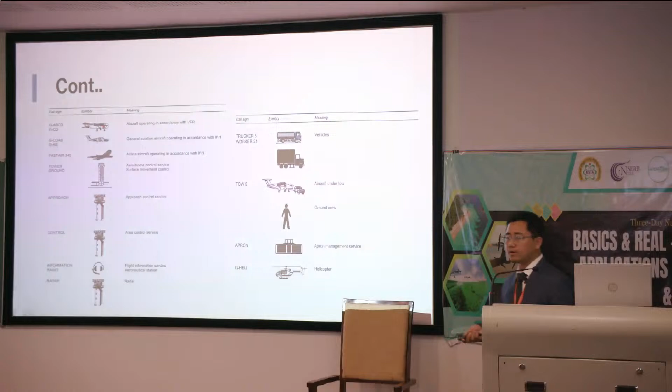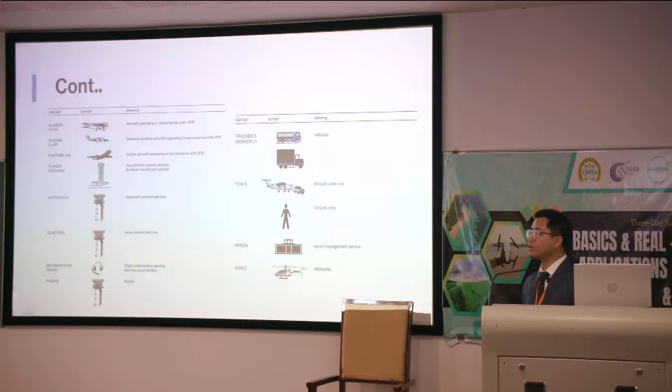Suppose you want to call a truck. A specific truck number and a specific worker or driver for that truck will be there. So you will call trucker 5, worker 21, to come to a specific location for an oil tanker or something like that. And these are different word phrases.

Acknowledge means let me know that you have received and understood the message from air traffic control. Or affirm: yes, affirmative. If you are flying a jet fighter in an emergency and about to crash, you will say, as heard in movies, Mayday, Mayday. That is one of the phrases of radio telephony phraseology.

These are the different units of service and their suffixes. For example, control center will be called control, radar is generally radar. These are the different meanings.

So how to report the position and altitude of your aircraft. First you have to identify your aircraft, since there will be many aircraft in the airspace. Identify your aircraft, position, time, level or altitude, and after certain intervals you will report again at significant points.

This is the diagram. The pilot first says the plane name, the nautical miles and speed, the flight level, 330, which is 33,000 feet, and the intersection name. The pilot says these words to air traffic control, and air traffic control returns with "Fast Air 345, Roger that." So they got the message.

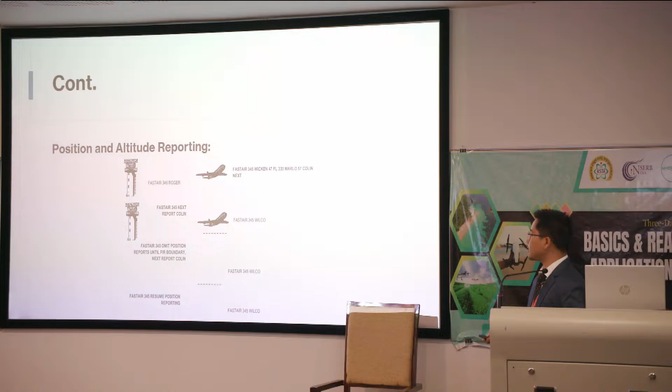And here, air traffic control is saying this again, and the pilot is saying "will comply" with this message. This goes on at certain intervals.

Next is flight planning procedures for UAVs, in terms of land survey. What does KML mean? Anyone knows? Yes, Keyhole Markup Language. We can modify that in Google Earth. KML is the area you want to survey. You draw that area in Google Earth, take the KML file, insert it into the drone software, and do whatever survey you want.

In the survey area, why are ground control points important? When you survey and mesh that area and want to create an ortho-rectified map with more accuracy, ground control points are required.

So KML preparation, identification of ground control points, which you mark in the real world in the survey area, and preparation of flight KMLs. Suppose you got a 7 square kilometer area and one flight can cover only 1 square kilometer. So you will divide it into 7 parts.

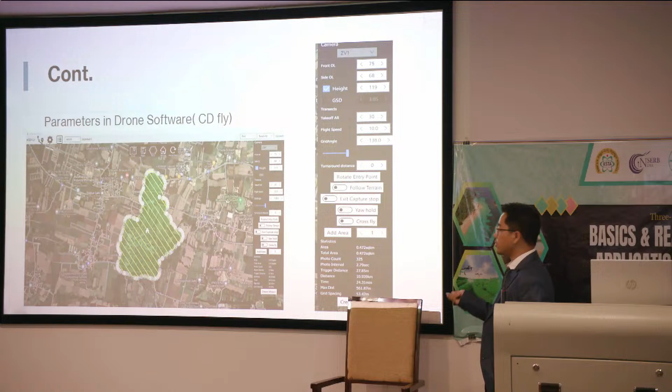Distance traveled is nothing but how much the drone will travel along this grid line. It is approximately 11 kilometers. And time taken will be 24 minutes. Maximum distance from home till the entry point is 561 meters. And the grid spacing is 53 meters. So you can see all the statistics here. After giving all these parameters, you will just create a mission. Here, create mission, and the next will be like this.

So this is the drone software in action. From here we were flying. It is going till the entry point. This was the entry point. These are different waypoints. You can see here, these are the parameters. Altitude: what is the altitude of the drone? 131, because it was doing terrain modeling. Although we have given 120 meters as the maximum altitude, in terrain mapping it will adjust its height according to the terrain.

Distance to home is how far the drone is from home, and satellite count is how many satellites are connected to the drone. And this is the average satellite connection. It should be less than 1. And this is the battery voltage. Maximum battery voltage for our drone was 25.2, so it is dropping. And wind current also you can see.

So all these params you can see, right? These are customizable parameters. Whatever parameter you want, you can customize that. And this is the ground speed. This is the time in air. This is the trigger count. And distance traveled, 0.42 meters.

Sir, actually, altitude will be fixed for a plain area. But if you give the terrain mapping option, suppose this is the terrain and our drone is moving, then the drone height relative to the terrain height will be 120 meters only. Yeah.

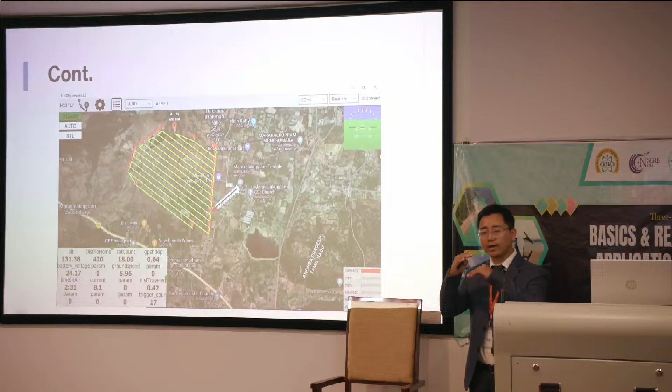As we can see, we made one mistake in this. We have not calibrated the drone properly, so the compass is showing that. If the compass is showing red, that means there will be a mismatch in the drone data. Some possible error might be there. Sometimes, if you fly near high tension wires, the drone compass will also get disturbed. Yes, some current issue might be there. So you should be at least 100 to 200 meters away from high tension wires, radio towers, or anything like that.

So next is collision avoidance system for UAV. Different collision avoidance systems we can see in cars also, like sensors; it will beep if it comes near. So in that case also we can integrate different collision avoidance systems in a drone. Sensor integration, like LiDAR sensors, to map around the area, if it detects an object. LiDAR is more accurate compared to a visual camera.

So we can integrate that. But the problem with a LiDAR sensor is it's very expensive. It's not economical. Then obstacle detection, like with machine learning, we can also do with a camera.

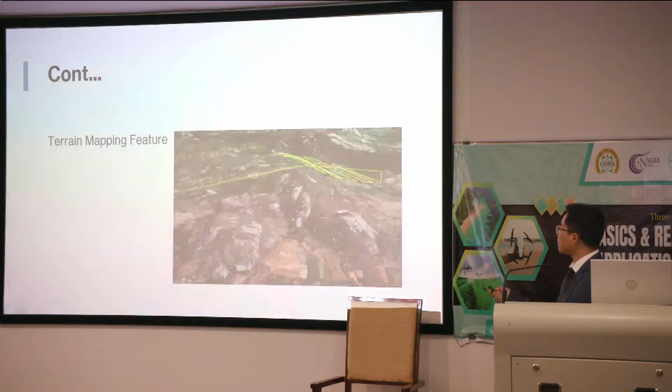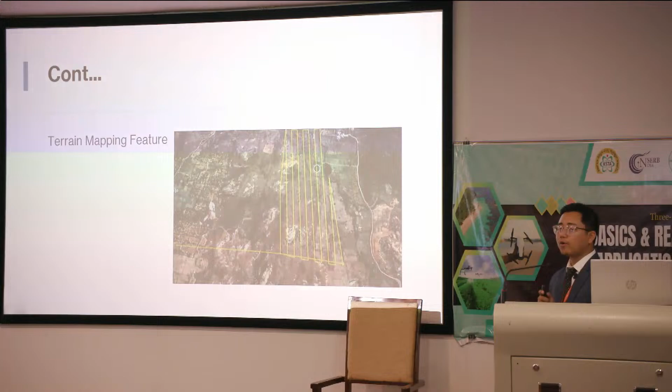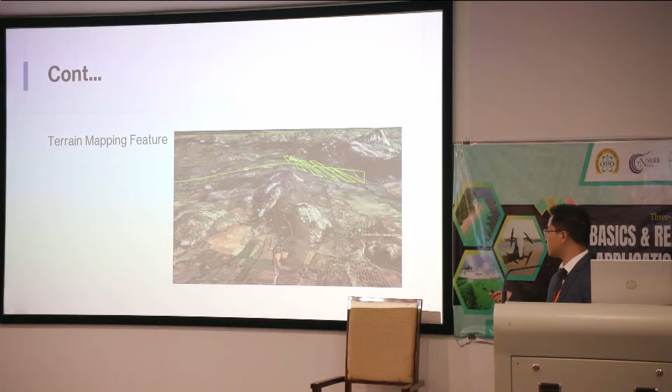So this is one of the collision avoidance systems, the terrain mapping feature. Sir, it's already applied in the software, but if you want to see this part, it is actually integrated with Google Earth. In Google Earth, all the Earth's terrain features are already there. But a new hill can come up, right, sir? So that is one of the things. But one issue here is, I'll convey that.

This is the hill. Suppose sometimes what happens is, above this hill, a tower will be constructed. So how will the drone software map the terrain? How will it know? It won't know, even if it has a sonar system, LiDAR system, or camera.

So what we can do is, the drone pilot should be careful about that. He should visually see and avoid that area. Although if it needs to be mapped, he has to give some altitude, or otherwise climb the hill and fly above that tower. Mostly the tower won't exceed 80 to 100 meters, so 120 meters will be fine.

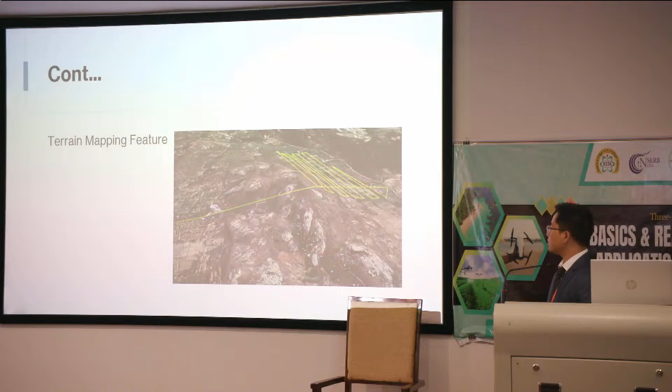So how to do UAV crash analysis, drone crash analysis? If the drone is crashed, suppose you are flying in an area and it crashed at that location, what needs to be retrieved and what needs to be visualized? It's like an inspection report. For example, a crime scene is there, so how do you make a report? A drone crash is also like a crime scene only. Certain lakhs worth of drones get crashed. It's a huge loss. So flight logs data - like in an airplane, if it crashes, a black box will be there.

Yes, so in drones also, flight logs, that black box type will be there. We should retrieve that flight logs data. And physical inspection is there - where it is damaged, in which wings, if all the wings are damaged or only some part, or if the motherboard is damaged. If the motherboard is damaged, then the whole drone is gone.

And environmental factors - suppose you were flying in a cloudy day when it's about to rain, or a high wind area. This also contributes to UAV crashes. Flight path - I'll show you one case study next. Human error will also be there. This is the case study linking to that point. System malfunction - sometimes, yes, it is a machine, it is not perfect. Sometimes overheating issues might occur. Malfunction will be there, it also contributes to the crash.

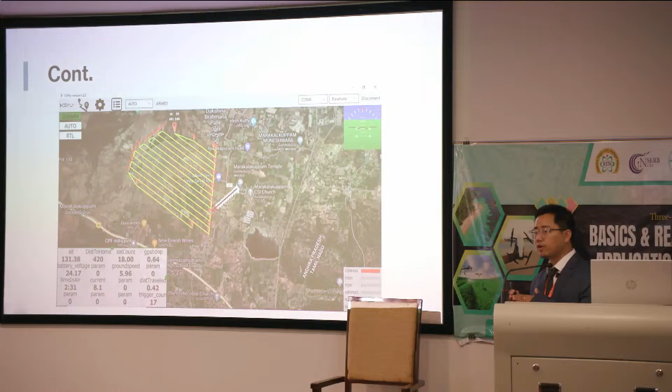And battery and power - you should always monitor the battery voltage. As you can see in this software, you are monitoring the battery voltage. It should not be less than 18 volts. Although it has a fail-safe feature, sometimes a sudden drop of battery will happen. For example, a huge wind gust comes opposing the drone, and it will consume more battery. So that also needs to be taken care of.

And rules and regulation compliance you should always maintain.

So what the drone did is, the area is here and he was flying from here. He thought that if he gave terrain mode feature, it would have gone above this hill, but he forgot to give it. So what happened is, you can see here, the drone flight went till the takeoff altitude, and it was going to the entry point, went straight, and hit this mountain. So the drone crashed - that was human error and a visual inspection error, not a technical error.

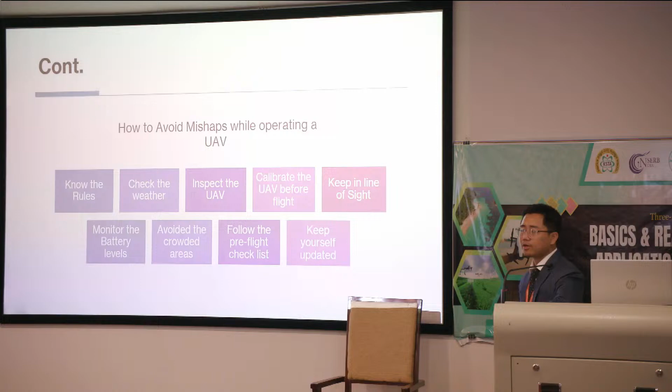So keep yourself updated, that's the main thing. Always keep updated with the rules, regulations, and different technologies.

A future advancement required in this field is an automated unmanned traffic management system. Like in India, we have Digital Sky, as I said before. In Digital Sky, it is not automated, we are entering the data manually, and live airspace is not there for drones. It should be developed, along with advanced collision avoidance systems.

Speed limit will be there. And development of secure links and reliable data - drones will be flying around, but how to secure that? Someone can hack it, because it's an open space and unrestricted airspace. So you should develop security measures for that.

And integrating real-time updates of geofencing data - for example, suddenly somewhere it will show a red zone, some minister is coming, so that airspace is restricted. Live updates directly should be there. Widespread integration of simulation-based training - to advance in this drone or UAV field and get our youth interested, simulation training should be there, to get them more interested in how to fly and what opportunities exist. It will create an open door for them.

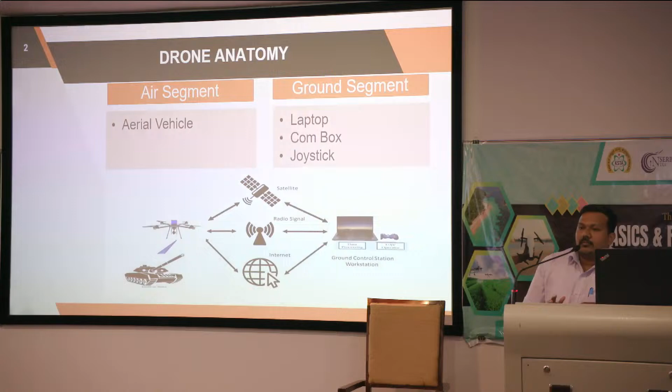Not only that, if the drones are very long range drones, for the communication, everything, in case of military drones, they will rely on even satellites. So satellites are also a part of the drone systems. Except the GPS, anyway, GPS satellites by default are part of the drone system. So other communication satellites for military purposes are also part of the drone systems. So we'll go in detail about the communications, how it is going to happen.

So this is typically the multi-copter we are going to see here. The model we are seeing is the Tunga Trishya Pro. We have got it from Tunga Systems, they are the manufacturer. There are multiple kinds of drones you must have seen in previous sessions. Now what we are talking about here are professional survey grade drones. They are typically around 4 to 5 kg and come under the small category. They will have a minimum payload endurance of 1 hour.

But there are nano categories, less than 250 grams, that we are not using, because basically we are a mapping agency. We do a lot of mapping. In addition, all the surveillance and other activities we are able to do.

So as I explained, there is a ground control station. This ground control station consists of a communication system to send and receive. Then they typically should have an antenna, where the radio communication is happening. So the radio antenna is there. The radio channel is 2.4 GHz. That is the open channel for Government of India. Only on 2.4 can you operate any communications. Anything beyond that is not allowed. But the ground demonstration you are seeing is a typical system.

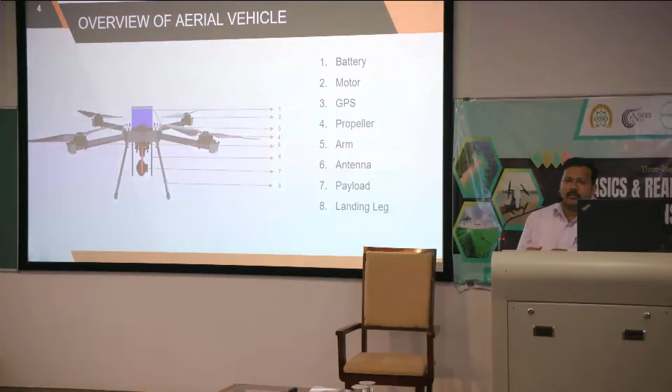So in addition to the existing GPS, there will be a high-end GPS on board. We call these PPK enabled drones, Post Processing Kinematic. A base will be established on the ground near the ground station. We do the positional corrections of the satellite, drone and sensor later, so we are able to create proper 3D models, orthophotographs, digital elevation models, everything.

So the propeller, arm, antenna, payload, and landing leg are part of the vehicle. We are going to see a little bit of detail about that.

So motors, most of them are DC motors only. There are two motors people generally talk about: brushless motors and brushed motors. Now almost all drones come with brushless motors. It is nothing but that the commutation of the motor is electronic.

That's the difference. Knowing this much is enough, because we are not going to do much work on the motor maintenance part. If that kind of detailed repair is required, it has to be handed over to the OEM manufacturer or an authorized service agency.

Okay. The propellers: everybody knows the propellers. It's a blade, so it will cut the air, it will create the empty space above the drone, so it will create a pressure difference, you must be knowing that.

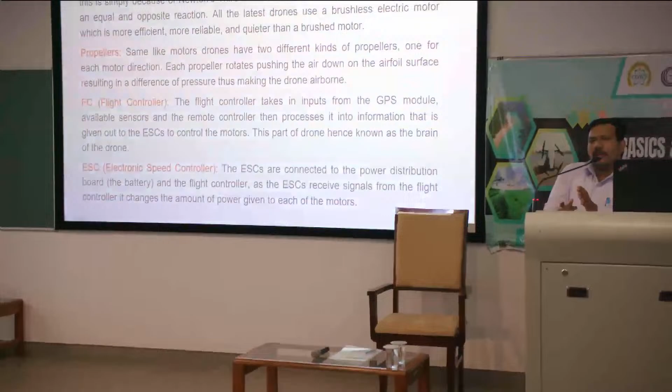It is required. Then the flight controller takes all the inputs and directs the plane. It has a GPS module, available sensors, it will be linking with everything, and the remote control obviously. So our communication will be linked through the flight controller. It is basically the brain, an important part. It will have an autopilot mode, different kinds of pilot modes, and all command and control structures inbuilt for navigation, flying, mapping, everything.

Then one more device is the electronic speed controller. Through this the speed will be controlled, the power will be controlled. The name itself indicates that.

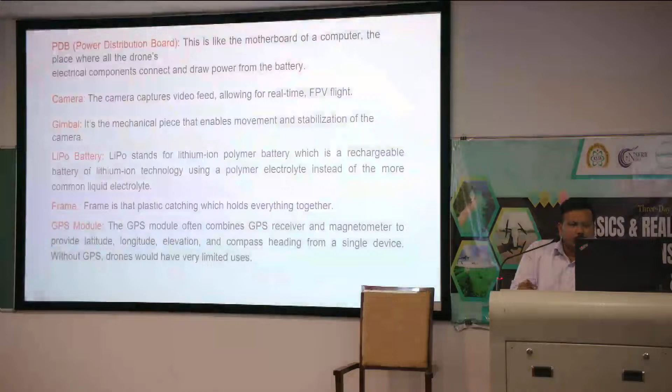So the power distribution board. It's like a motherboard of the computer. It will connect all the electronic components and draw power from the battery to give to them. It's basically a motherboard of a computer; all the electronic parts will be embedded into this.

Next come to the camera, payload, sensor; these are the same terms. Typically there are two sensors mainly, for surveillance and survey. Surveillance is video photography, so anything where real-time video is required, it will capture. And thermal; there are multiple payloads we are going to talk about. The thermal sensor is also video photography.

Then coming to mapping, with the photogrammetry payload. It's a still frame camera. It will be used to collect pictures from multiple angles to create orthophotography and a digital elevation model. And we will have agri drones, so the payloads will be different.

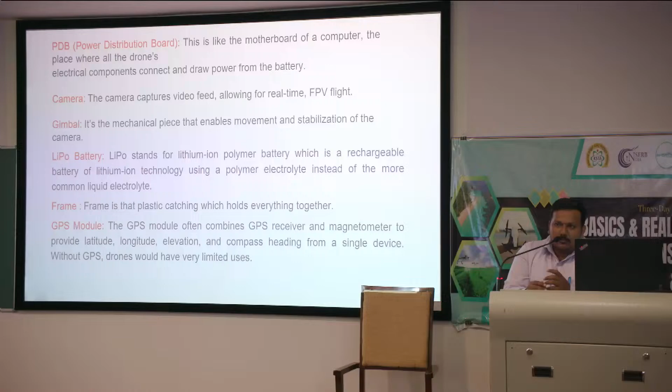Then the gimbal. The gimbal is a mechanical mount. It enables movement and stabilization of the sensor rotations. We can give any rotation, any movement through all three directions, and the gimbal will help with that. The gimbal will be controlled through the flight controller.

The frame is the skeleton of the drone; everything is going to be attached to the frame. Then the GPS: the same chip will be on this also, except for the survey grade drones. But it will have a minimum of two.

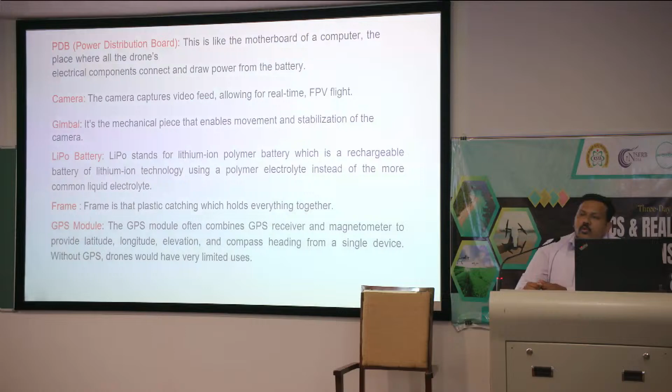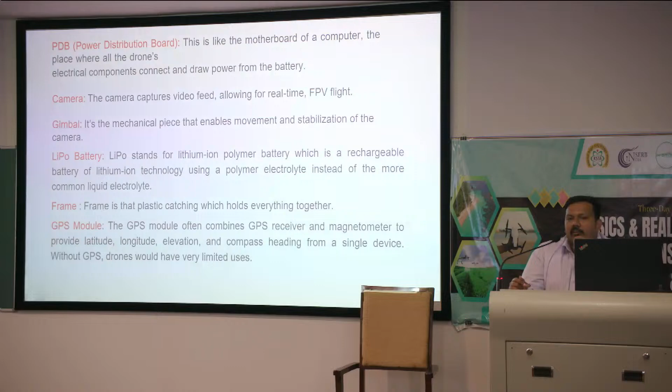Because of any failure, the redundancy will be there to avoid any mishap. Even with a failure, there are mechanisms in the drone to come back safely. There are safety measures the class will explain: return to land, return to home. Still, to avoid any delay, GPS redundancy will be established. It will be a small round object. It will give positional accuracy of 3 to 5 meters. If you are okay with that accuracy, we can work on that.

Then the remote control receiver. It is the sensor receiving the signal from the remote controller. The remote controller provides the link between the user and the drone. They are similar to other remote controllers; the difference is they are more sensitive and more robust because they have to work on it.

Then coming to the output of it, the video transmitter is required. Whatever the drone sees has to be communicated in real time, otherwise there is no use of it. For most, there will be use, but not the immediate use of it.

So for that, it immediately has to be transmitted. The transmission can happen over a small distance; they even have internet-enabled drones, nano drones. But for long range, you need radio wave communication. So we should have that antenna.

With that antenna, the video transmission also happens on a different channel. That's it. So the company uses the RF frequency for communication and control, as well as transmitting the video or photographs, whatever we are capturing, to the system.

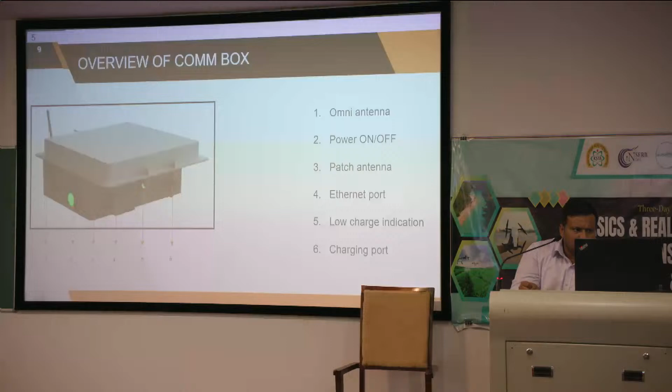So what does the communication box do? The communication box definitely should have an antenna. Antennas are of two types, patch antenna and omni antenna. The omni antenna is 360 degrees; it can receive and send the signal, but the communication range will be smaller. The patch antenna can receive signals from or send signals over a large range.

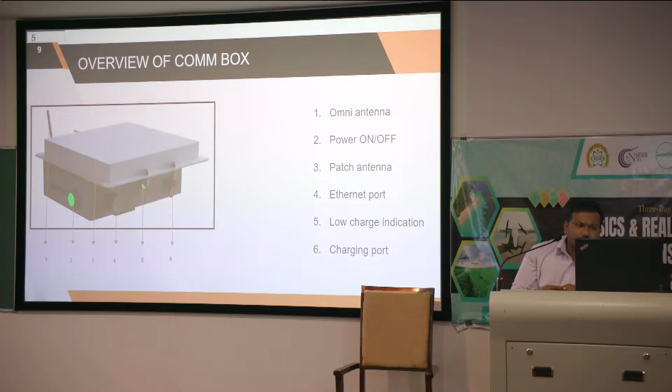Typically our drones now have a 5 kilometer range. This antenna is good enough without any LOS, loss of signal, or line of sight; both are LOS. With that we can do long range mapping. We have to do continuous mapping of the area, so in that case we use that fully.

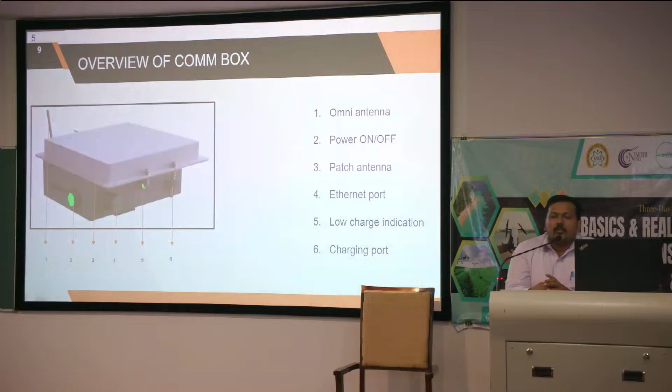Obviously you should have a power port and a communication input-output channel, here nothing but Ethernet communication, and it should indicate the charging capacity. Every communication box typically has this. When charging comes, we will see what things are required to do that.

Roll, pitch, yaw is very important to understand to control drones, and if you studied photogrammetry or stereo data processing, you also have to measure roll, pitch, yaw to process the data accurately and effectively. It's the rotation about the x-axis, y-axis, z-axis. The controller will know that.

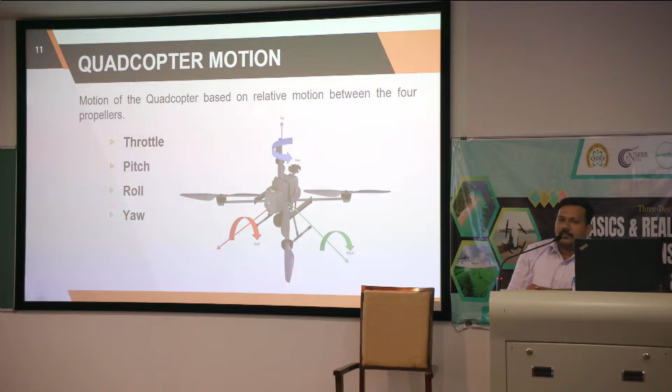So it is very much required; the gyroscope in the system measures these angles. It helps us make the drone more stable, straight, or as per our requirement.

So propellers: in the case of a quadcopter, there will be 4 propellers. 2 will have clockwise rotation, and 2 will be anti-clockwise or counterclockwise. So this is very important while actually doing the assembly. We have to do it properly. If you mismatch the propellers, it will crash.

Even well-trained pilots sometimes miss this. Even though they have given the same color codes, everything, the screw will be one color, red or blue, still it happens. That's why in maintenance we are going to see what checks are required, so we should get into the habit. It is like driving a vehicle, so we have to build more habit around it.

We should do simulation; a lot of simulation software is now coming. So whatever drones we are using, you have to use the simulator to get full control, if you want to be a drone pilot.

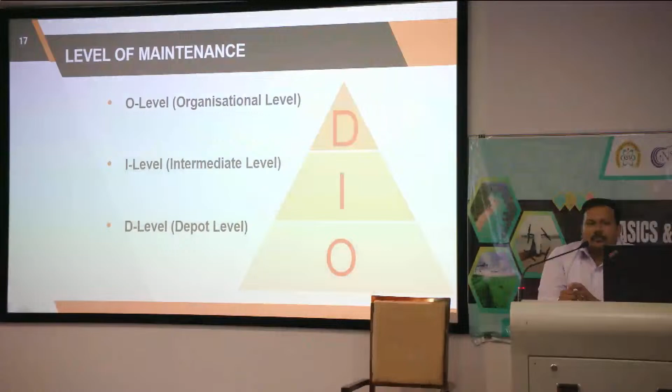Okay, you can ask me: can I do all the maintenance? No. A remote pilot cannot do everything. Basically the pyramid has 3 levels. There is the organization level, that means our pilot level, the user level. Then the intermediate level: if you are a very good remote pilot, with additional effort you can do that intermediate level of maintenance. Then depot level: it is the OEM, they can do replacement and overhaul. So any maintenance will be part of these 3.

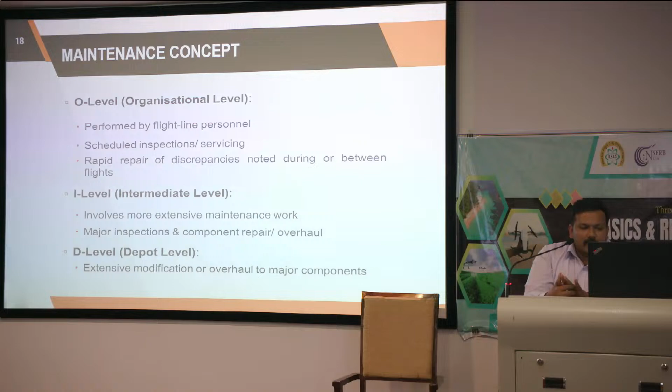What is organizational level? It will be performed by flight line personnel: scheduled inspection, servicing, rapid repair of discrepancies noted during or between flights. So we are checking for any discrepancy. What is intermediate level? It involves more extensive maintenance work. Major detailed inspection is required, and component repair is done. Depot level is beyond that. It is more like a manufacturing level, if any corrections are required.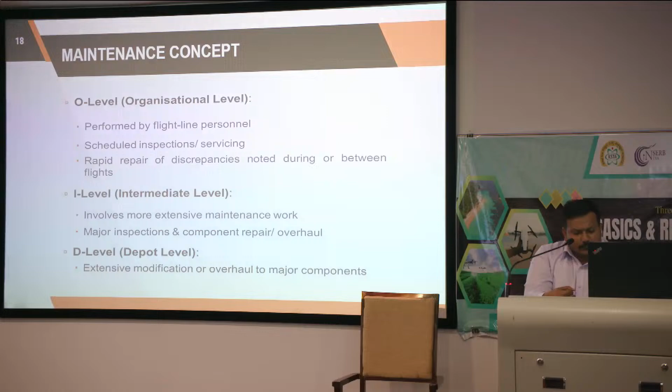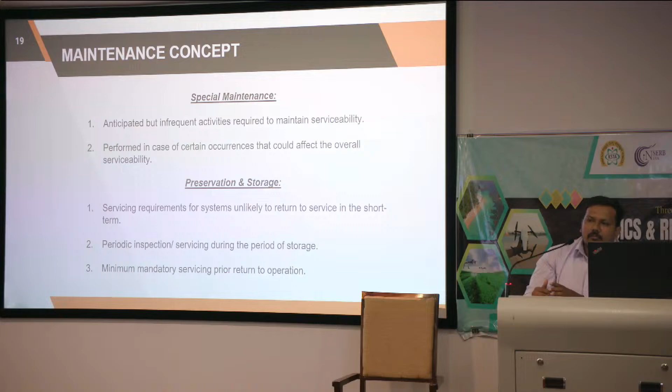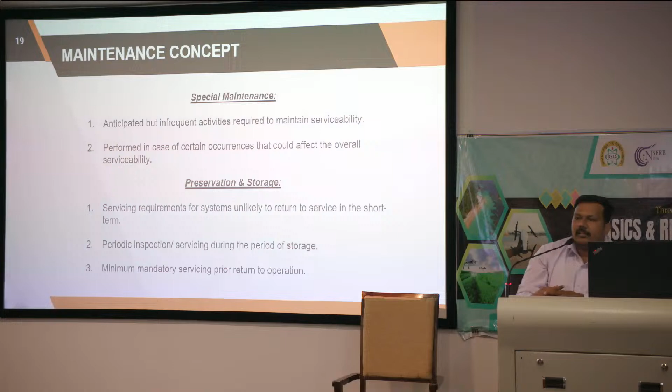Each manufacturer will provide a complete manual for their systems. Generally they are the same, but depending upon the modules and components involved, the procedure will slightly vary. We have to study that at the time of procuring the drones; the OEM will do that. Typically they will provide 1 week of training. I am not talking about the remote pilot license. It is only for handling the drones.

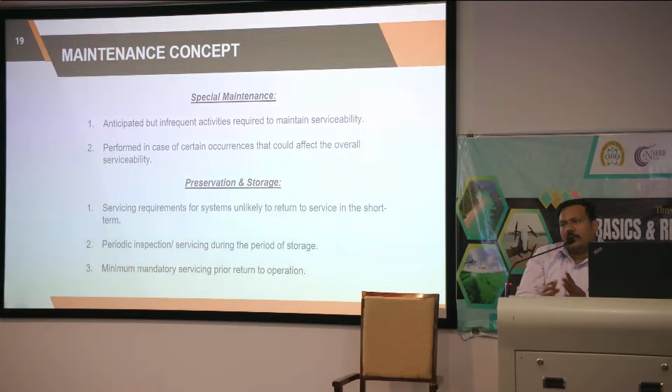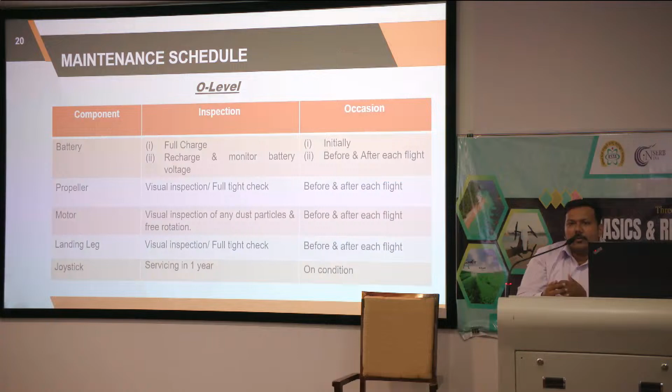So typically some timelines schedule we are talking here. Battery anyway full charge, everybody knows we have to do first full charge for any battery, so we will do that. That is already in our head. So recharge and monitor battery voltage every time, how quickly it is going in. Every time battery recharge will be after flight, that is mandatory, every time we have to do.

Propeller, we have to do the visual inspection, the tight check every flight, before and after. Before flying also you are doing, after flight also you have to do. So we cannot be a little careless or something. It should be very, very critical. Propellers is very, very critical. So whatever before and after each flight, it is very much critical reference.

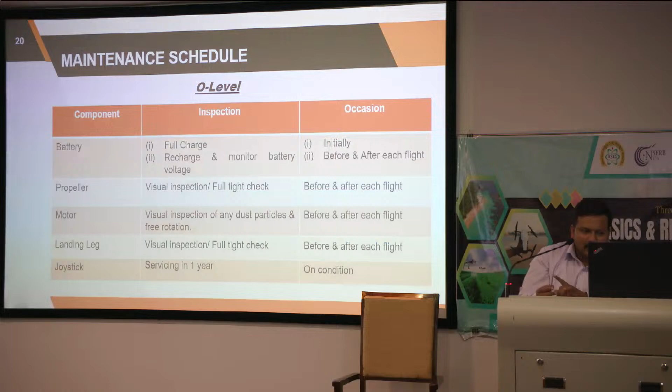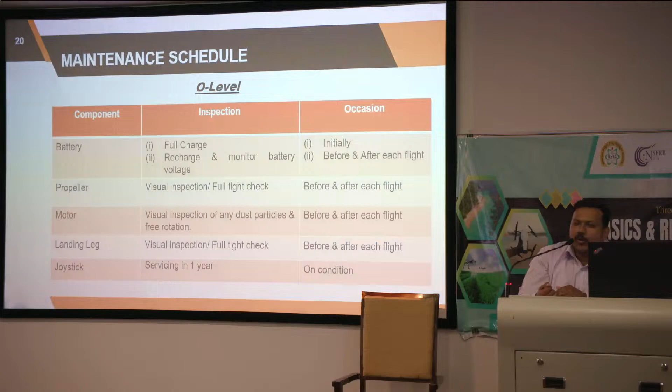Then motor, so motor visual inspection, any dust is there, free rotation is happening or not. It is also before and after each flight. So landing leg, visual inspection, whether it is fully tight, any crack is there, any damage occurred. So joystick or remote controller, if you are using, typically 1 year is okay for the remote control. If you are a rough pilot, you have to do it little frequently. So it is how you are handling your drones, it depends upon it. So it is on condition, there is no time.

So battery, we have to check. This battery charger is little different from a normal charger. It is a balancing charger will be there. The battery will be, multiple cell systems will be there inside the battery. Depending upon the drone endurance, 6 cell, 8 cells, 4 will be there. So 1 or 2 I can show that.

So always the capacity of the battery should be 80% more. If it is not even charging 80%, we should replace it. So typically a 200 charge, 300 times, it should be recycled.

So there is a discharge also, it should be there. If you are putting your drone for a long system down, you have to discharge the battery, remove it and keep it idle. So all things will come in the manual. We have to keep this checklist, we have to remind it, note it down, every action we have to do that.

So landing leg, if in case of any issues, otherwise 300, 500 landings, now every drone is capable of doing that.

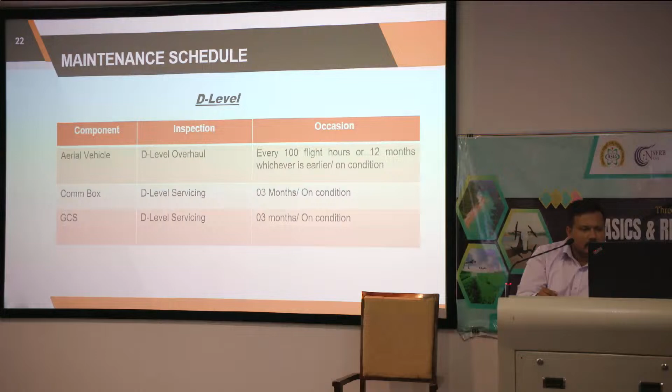So we have to send every 1 year, anything overhaul required, we have to send to the OEM for any further complete overhaul, any damage assessment, everything that has to be done. So Comm Box, GCS, depending upon the issues, we cannot do much on maintenance into that, so only dust and things. We cannot sit and put screws or do electronic or nothing. We should do that because sometimes it is working, but in flight it may give the problem, so we will end up in trouble. So that has to be clearly done by the OEMs or an authorized service agency for the purpose.

So what is required for this maintenance, anyway for battery charger, so that it will do the charging, discharging, cycling, there are all that buttons, modules, everybody available. So balancing, charging, everything is there. So we have to do properly. That is enough, that charger itself acts as a tool to check everything. It will give every vital information required for verification and checking.

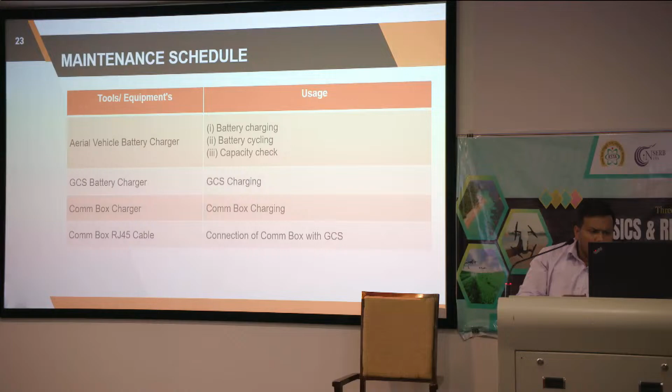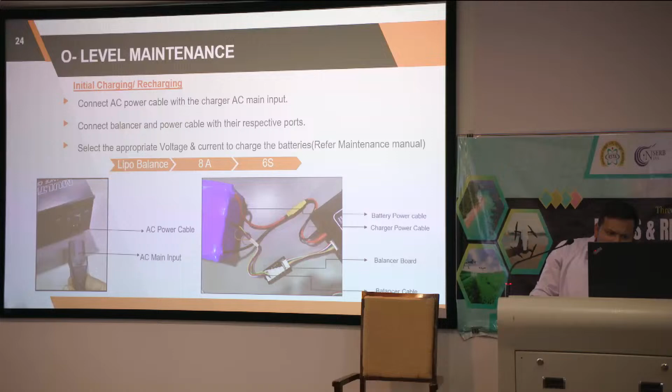So some figures here we are seeing it. This is Tunga Systems, their battery. So it is a 6-cell battery, 8 amps required input. So these are the components: battery, power cable, charger power cable. There is a balancer board. So to increase the capacity of the battery, and the charging should be also having well balanced. So they are using the balance board for that separately. So without that also you can do charge, but it is recommendable to use the balancer into that.

So it is organization level we are doing. This is the way typically Commbox recharging will happen. It is low consume power compared to the battery required, so we can use that. It's only 3 cell battery, 1 amp is enough to have a full charge power up.

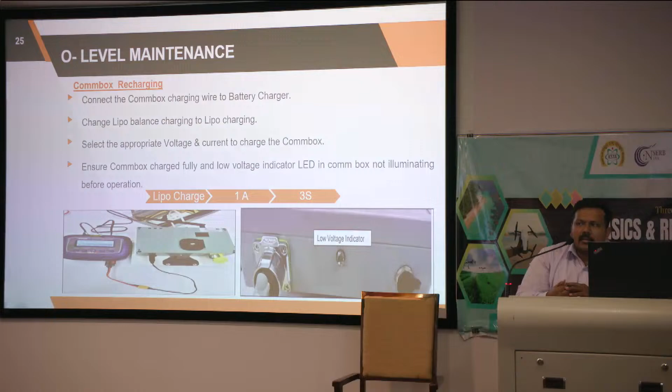So any indicator, always all battery will have indicator. Low indicator should not be red, that's it, so it has to be. So anytime before starting the flight, 80% of the battery power should be available.

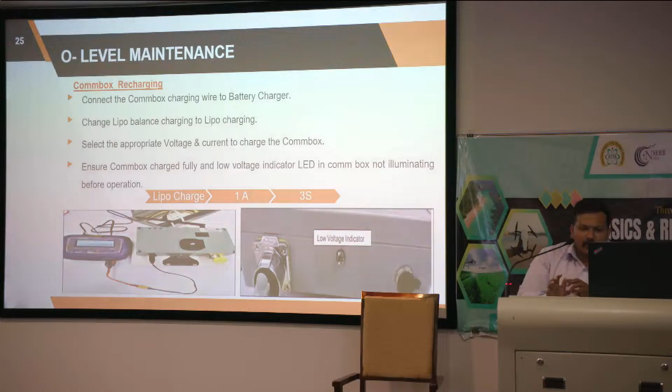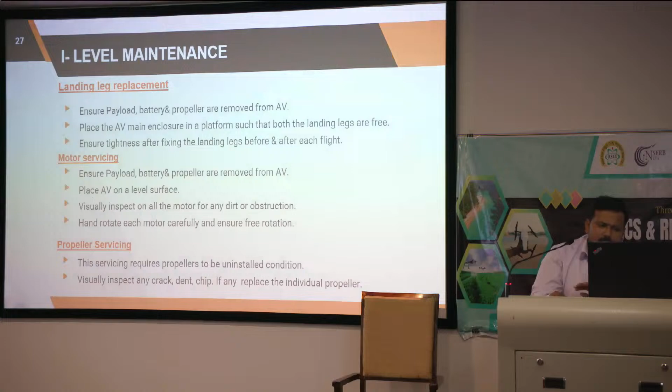So what if something happens? That's also part of it - if a crash or harsh landing happens, what is the procedure required?

First, anyway, right now all drones above micro category should be insured, third party insured. The insurance is part of DGCA, I think you covered this in class. You have to take proper photographs as proof for collecting, if you want to claim insurance. So everything has to be properly documented first.

Then remove the battery, second, without any hesitation. Then remove the propeller. If the battery is damaged, it can be explosive, so you have to keep it isolated. Then you have to convey this to customer support, whatever the case may be.

So we should know what we are going to do in case of that. Even if you try to hide it, the flight parameters and logs will show which command was given - everything will actually be recorded. Every activity, every control will already be recorded in the system logs. So whether it's a system failure or operator/remote pilot failure, everything will be easily detectable. That is the information we will have.

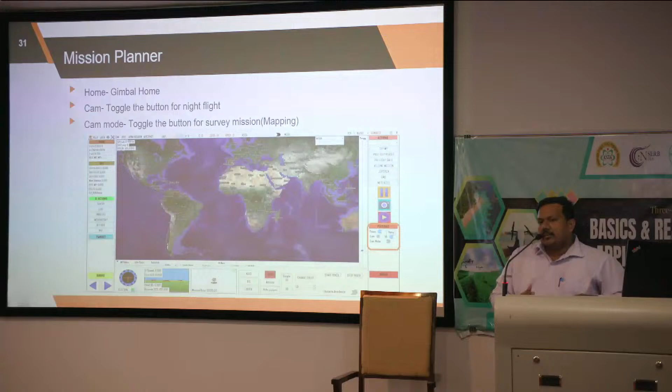So switch between, if you have the dual payload, some payload will have a day camera and night camera - it's nothing but a thermal camera. You can switch over between the video simultaneously, you can parallel view. All can be done in the Mission Planner or controller.

So it will tell you whether it is autopilot mode, what is the aerial position, what is the range from ground station, what is the height, altitude - everything will have information in that Mission Planner.

So typically one status bar will provide speed of the aerial vehicle, distance from home point - that is nothing but the GCS station, home point. So at the start of every flight, you have to record what is home. We have to tell the system, because in case of failure, it should come back. That is part of safety measures, part of drone operations - we will learn in detail, that class will cover.

So here very much you have to see that two kinds of battery status are required - not only drone battery, your ground station battery also. So you cannot miss any one.

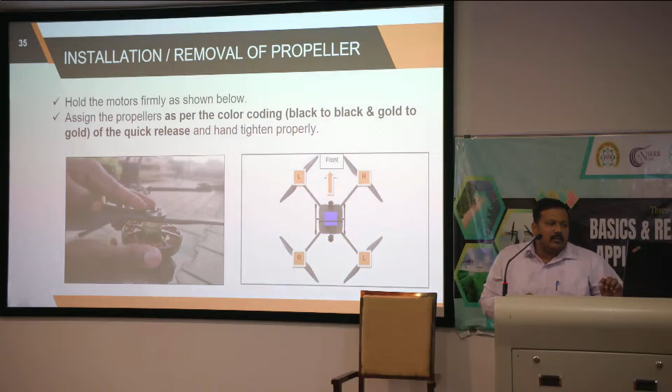So very important in the maintenance, the propeller installation you have to do properly. You should not attach the clockwise propeller with the counterclockwise propellers in case - that is very much important, very critical. It will crash immediately, it will fly and it will dump. So it will cost us more.

So one important thing you have to do is compass calibration. Everybody having a mobile phone, there is a compass app. So how are you going to calibrate? If you open your compass app, it will ask you to calibrate - it will ask you to rotate like figure 8. So once you rotate, then the compass will get calibrated. Similar way, we have to do the drone in all directions.

So it is recommended every flight, before flight - compass is part of the pre-flight check. So compass calibration is made. I will show some videos - this is how the compass calibration is going to be done.

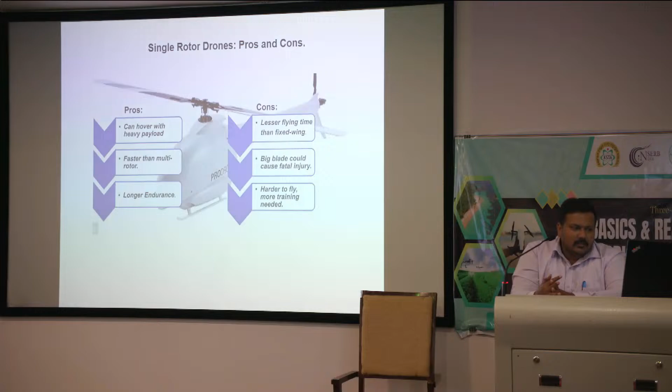Since it is heavy, it should have large blades. These blades have a lot of danger. That's why handling a single rotor is very difficult compared to a multi-rotor. So it is difficult to fly.

Now coming to this session, we are mostly oriented to the multi-copter drones or multi-rotor drones. The terminology used is tricopter, quadcopter, hexacopter, octocopter, so from that terminology you can see how many rotors are there. Generally a quadcopter is a well balanced one. People are using it effectively. We are also buying and using mostly quadcopters. Handling is easy, so we will learn flying very quickly.

Because with the fixed wing, you have to be more careful while taking off and landing. You have to look for an obstruction-free area, larger area, more flat surface. But here for multi-copter, a small 10 meter by 10 meter area will be good enough for a normal pilot. They are able to hover in any place very easily. Fixed wing hovering is very difficult.

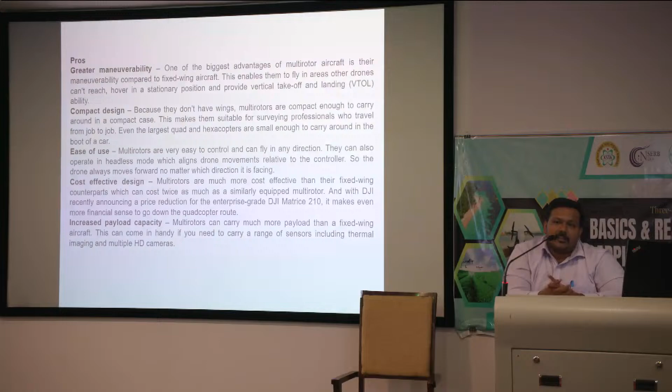Obviously it has high power consumption, so the endurance is going to be less. That is the big difference between fixed wing drones and this. So the same thing we discussed, a little detail is written here. Greater maneuverability, compact design, ease of use. Very important is cost effective. If you want to buy, it costs less than the fixed wing drones. So that is one major thing.

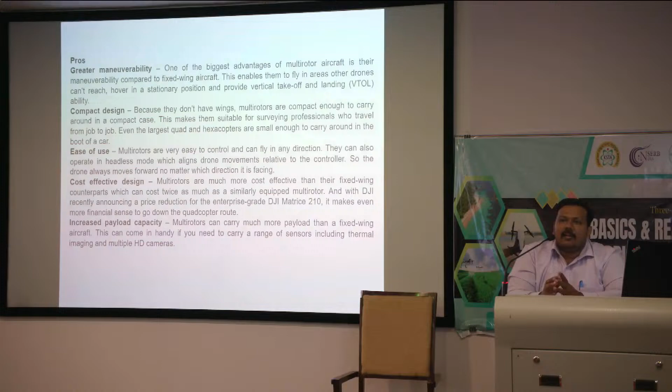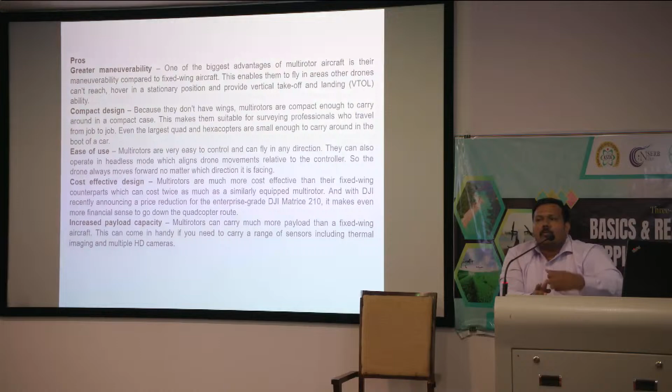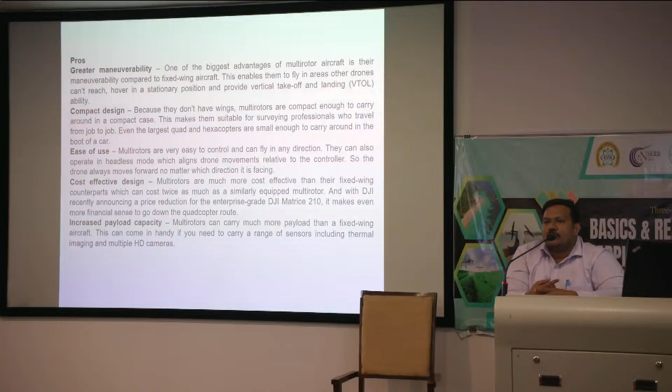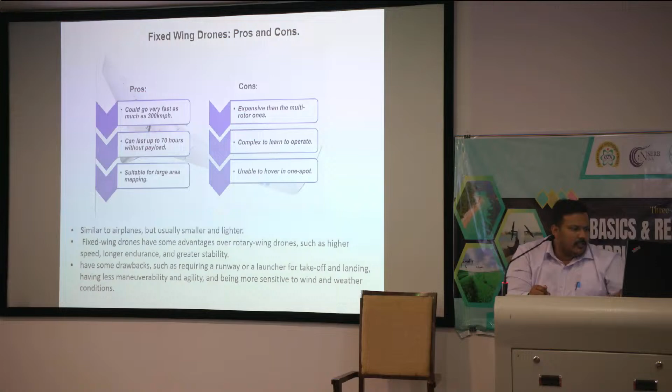Same thing we discussed. So now currently these VTOL fixed wing drones are there. So the concept of which is best is fading away a little. They are trying to manufacture fixed wing and multicopter with the same efficiency. So after some time, the gap between fixed wing and multicopter will be reduced, and we can use either for both operations.

When giving our requirement specification, we will not even specifically say it is for fixed wing or multicopter. The manufacturer can quote anything for that, and whichever is cheaper, we will get it. So hereafter both will be there, and VTOL will always be part of the system.

Okay, some applications of drones are also listed. There are n number of applications we can talk about. Since it is able to capture beautiful, high resolution pictures, 2 centimeter, 3 centimeter spatial resolution pictures, it can be used in so many ways. Photography, video, even people taking selfies. Everybody knows now, everywhere, all the marriage halls, without the drones it's not there. So it is used everywhere now.

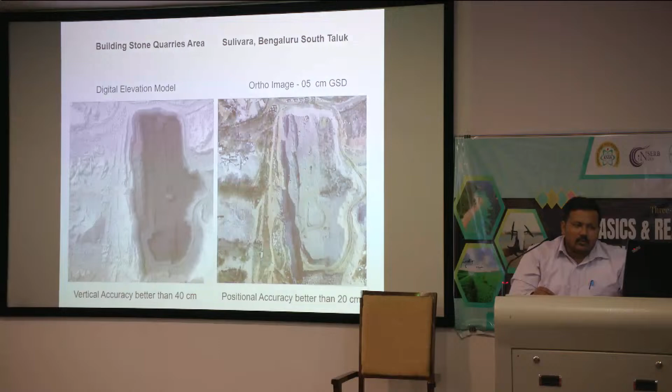The pre-level will be the Cartosat stereo data. It will give an elevation model from around 2005-6. So we will compare the total. This is some quarry, you can see that. With the details of the elevation model we are able to get every detail, so every small difference can be measured, and you can estimate the volume of each mineral excavated perfectly.

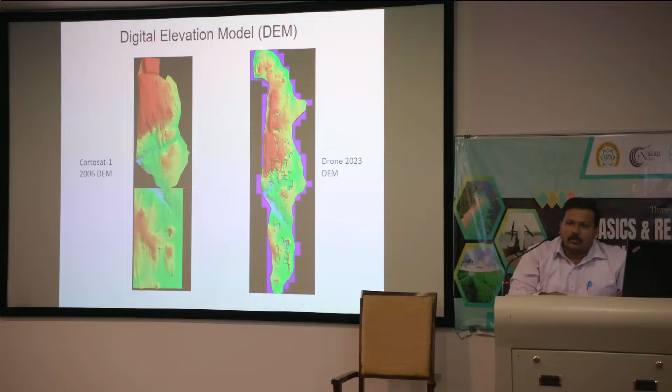So now in Karnataka we are practically fully utilizing it, and it is incorporated into the governance system. We give the previous level in 2006 and the same area now, so we can see how much excavation happened; everything can be quantified accurately. It is helping the government of Karnataka with encroachment identification and defaulters in terms of royalty payment. For every mineral, every ton, the royalty should come to the government. Depending upon these results, the defaulters are held accountable and actions are coming to the government.

Yes. No sir, no private, not right now. We are doing training fully only for data processing. But for full pilot training, we do it only through a proper channel, authorized schools, sir. No, we have not done private yet, but for government bodies, Karnataka state government bodies, with the proper channel requirement, it is supported.

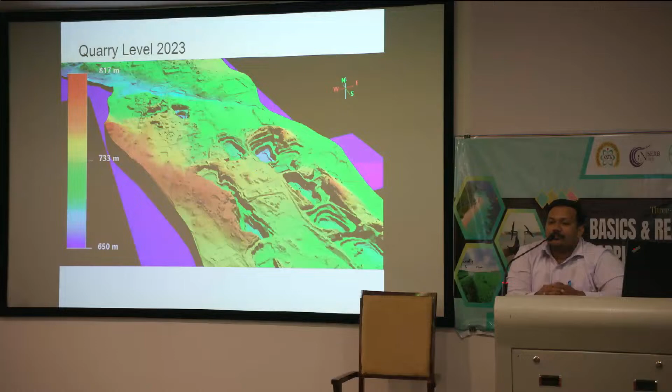So, next, now everybody is talking about the... Yeah, I got it. So AI. Sir, yes, AI can be utilized. What we are doing is nothing but AI with limited tools, limited methods, limited procedures. AI will increase it a little bit, so AI can be used, no doubt. But anyway, we have to train. For any AI tools we have to do a lot of training, with a lot of inputs. So we can do that.

All the software, what they are doing is basically half AI; it is AI only, so the tools are working. If individual intelligence is taken care of, then actual AI comes. There we still have to go a little distance. So yes, obviously it is part of it. You give the system 2 inputs and automatically everything will come up. Yeah, it is possible if the...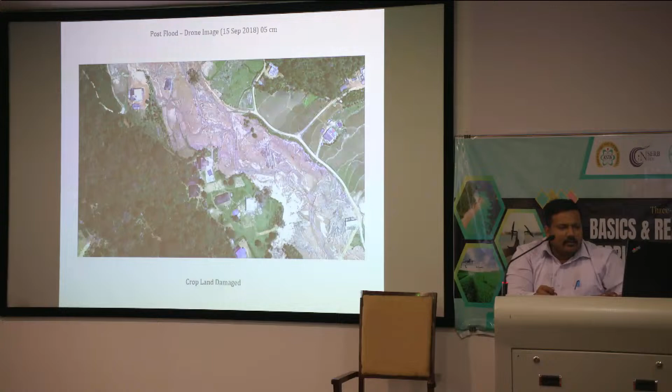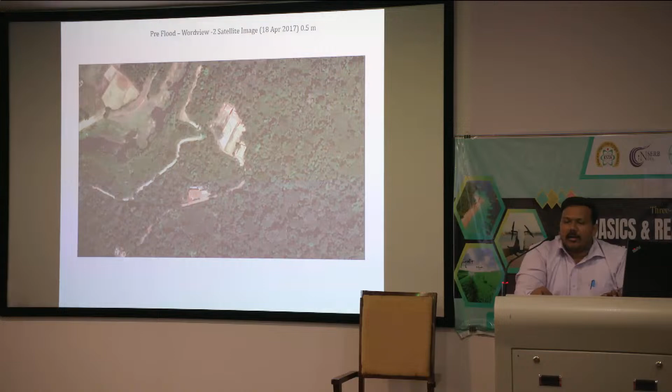Satellite will help us everywhere; where there is a landslide, we can map it. Optical sensor will provide it. Even micro data, using radar interferometry, we can do. But the severity, the detail level, drone will help us. So we can do that. So a few of the ortho images I am just explaining. These are the things.

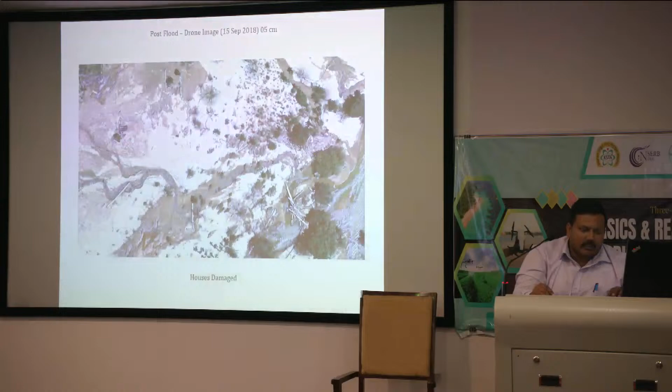This is satellite, same area, drone. So nothing was there. Everything is passed away. Previously this is a coffee plantation. It's previous, and this it was towards. So next previous one. This is agriculture land. Before it was this.

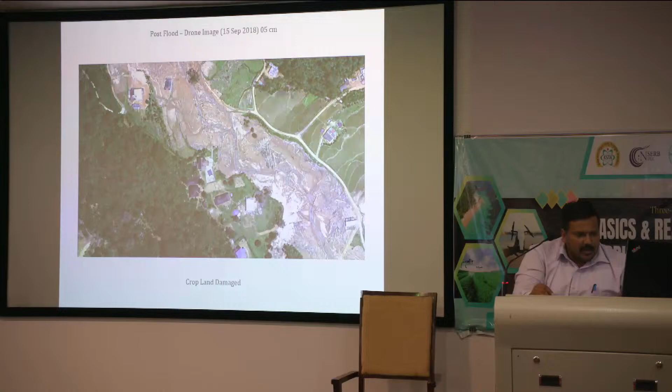See, at 500 meters it will be very good. Up to 1000 meters the range is fine. It has a 4x digital zoom. So it is a 1 kilometer range, the thermal sensor. They are uncooled cameras, because they don't record actual measurement of temperature, so they don't require it. A temperature anomaly is enough to say which is a hot body. So that is efficient enough, because otherwise it is unnecessarily costly.